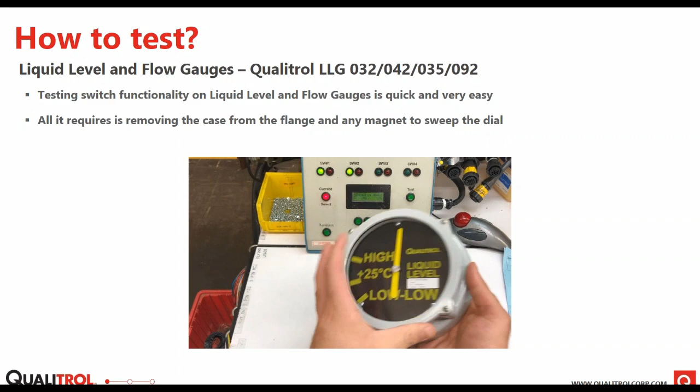They're magnetically coupled, so magnetically driven. All you need to do is remove the front case, and then use any magnet, and you can place that right on the center back of the drive shaft of the liquid level gauge, and you can actually move the pointer and actuate the switches. So here you can see there's the first low switch and there's the second low switch. And all I'm doing is twisting that magnet on the back. That gives a good simulation of the actual drive mechanism moving inside the tank.

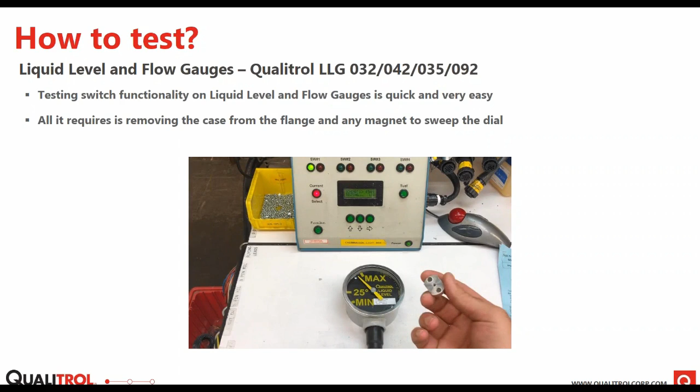And then the same on the 3.5-inch liquid level gauges as well.

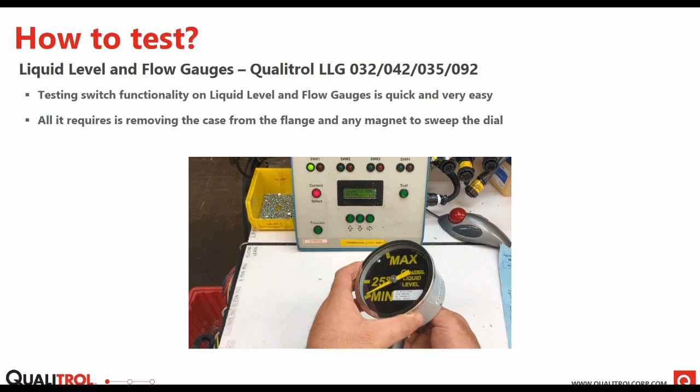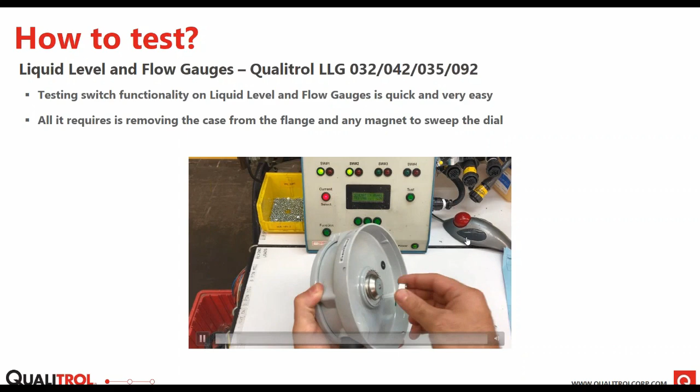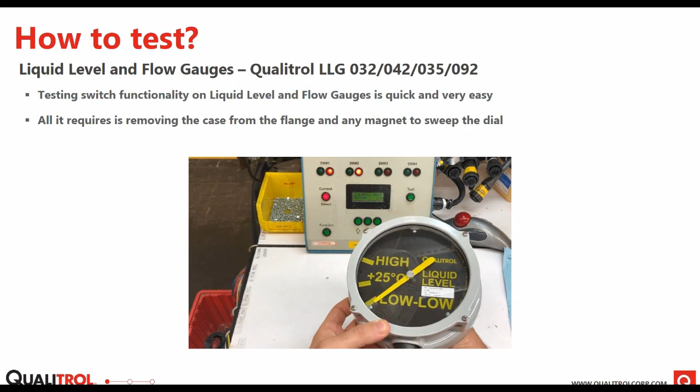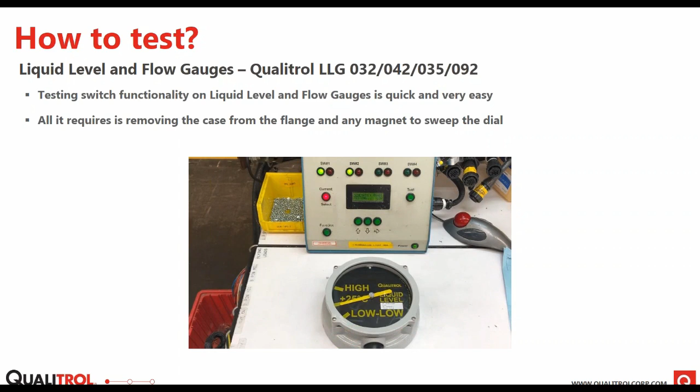One thing to note with the liquid level gauges is that the part of the gauge that takes the most environmental wear and that's out and exposed is the case. So the flange is covered up by the case on the outside of the tank, and then the rest of the flange is internal, which is most of the time submerged in oil. So doing a full functionality test on the flange itself, most of the time it isn't accessible or necessary. And for how simple it is to test the liquid level gauge, most of the time this is a great way to see if those contacts are still working and they're functioning at the levels where you think they are and where you want them to be.

Remote temperature gauges are used for obviously oil temperature and winding temperature, top oil and winding temperature. And these can also be used for alarms or cooling stages, turning on your cooling fans, pumps, your whole cooling system. So you really want those switches to be working and know that they're working.

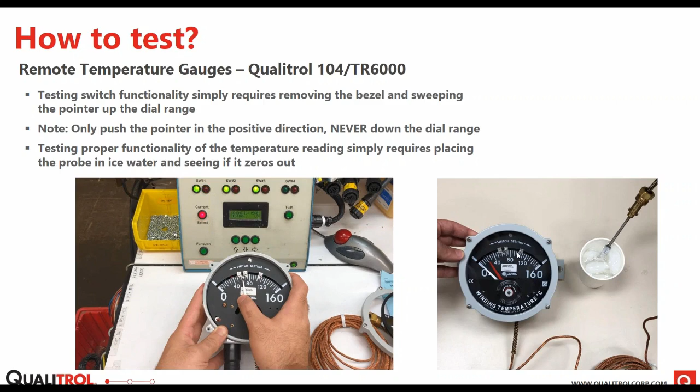So let's move on to our pressure relief devices. Here specifically, we're going to be talking about our large pressure relief device and our extra pressure relief device, which are LPRD, XPRD, sometimes the 208 or 213.

So full functionality testing of the pressure relief device is very difficult in the field. You would need to have a tank that you could pressurize to the relief pressure to simulate a blow-off of the pressure relief device.

Testing the switch is very simple on both of these. And the reason you want to test the switch is because that's typically the most common failure point. You're not going to have excessive wear on the springs or seals internally on the pressure relief device. The switch is what is out in the environment, taking the brunt of the damage and wear and tear, so it's best to test those on a regular basis too.

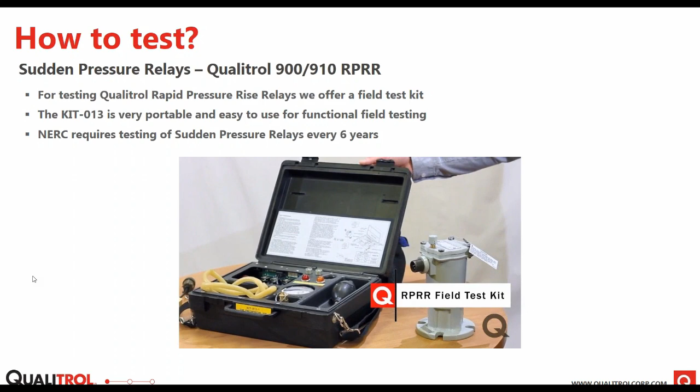To do this, we have a field test kit, which is our Kit 013. It's a portable field test kit that can be used to simulate an actual sudden pressure rise in the transformer tank. This video is a quick snip out of a full-length video on our website. What this test kit does is you hook it up to the vent port on the rapid pressure relay, and you simulate a sudden pressure rise in the tank by applying pressure to the top of the two chambers in the rapid pressure relay.

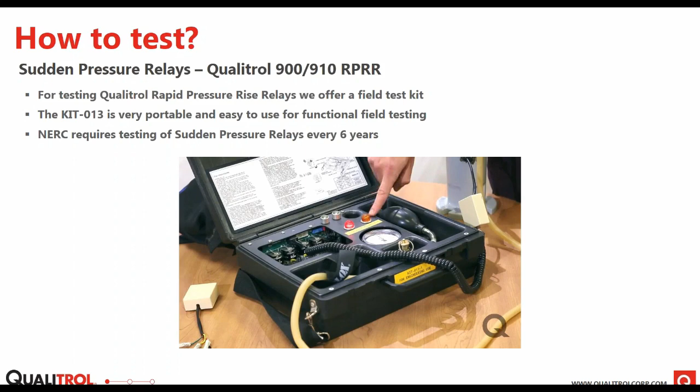The two chambers are separated by a bellows system. So if you increase pressure on the top of the system, it will equal out and return to a normal state. What we do with the kit is apply pressure on top, let the bellows level out and go back to normal, and then quickly relieve the pressure from the top, which simulates a sudden pressure on the bottom, driving the bellows into the switch and actuating it. You can see that here in the video.

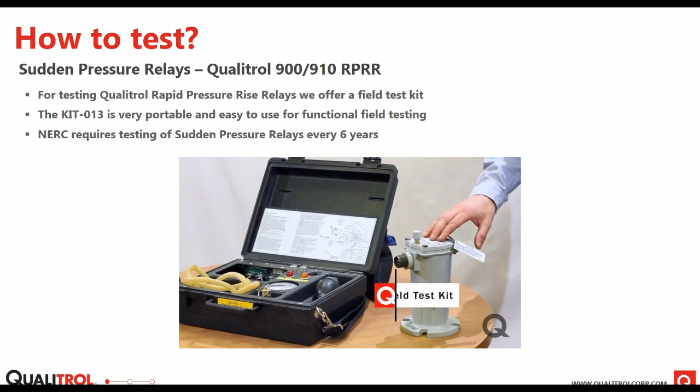Just to reiterate, you're applying pressure on top of the bellows system, waiting for that to level out, and then relieving that pressure quickly on top, which simulates a sudden pressure on the bottom, or in the tank. This can all be done with our field test kit.

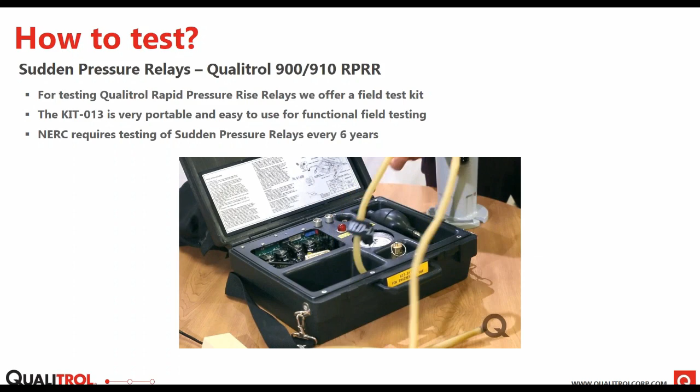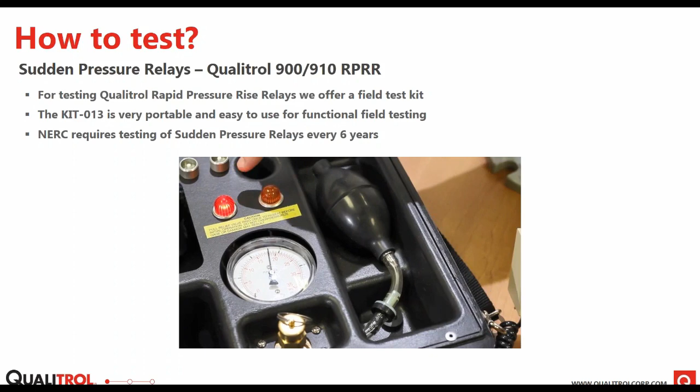With increasing regulations, there's actually a NERC requirement that requires the testing of mechanical sudden pressure relays every 6 years, which this falls into that category. Our field test kit makes it really easy to do so.

Last but not least, we're going to look at the seal-in relay that we offer. The seal-in relay is designed to take in a momentary switch contact and seal that signal in for an alarming or trip function. These are typically paired with our rapid pressure relays because those have a momentary switch action. When the sudden pressure rises, it actuates that switch, and then the RPR will settle back down, or the pressure will be relieved through some other means. You want to keep that alarm or trip signal because that was a serious event that occurred, and that's what this seal-in relay comes in handy for.

We often get questions on how to test these and make sure they're functioning properly in the field, and that is also incredibly easy, similar to the past products we've looked at. With the 909-300, which is the most current model we offer, the 909-200 being the previous model which is now obsolete, testing the 909-300 is very simple.

What you're going to do is lift the signal from the input, which is pins 1, 2, and 3 on the 909-300. So say you have an RPR hooked up to it, you want to disconnect that, and all you do is jump pins 1 and 3. This will simulate a contact closing on those terminals, which will give you your trip function.